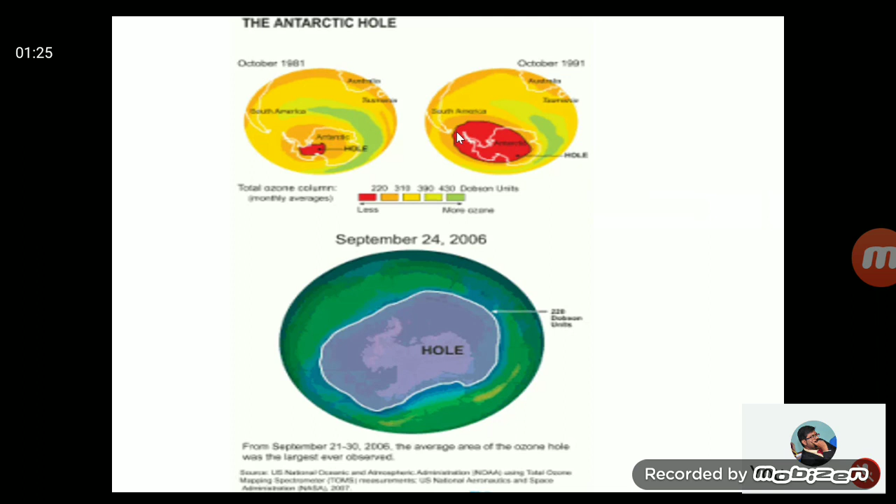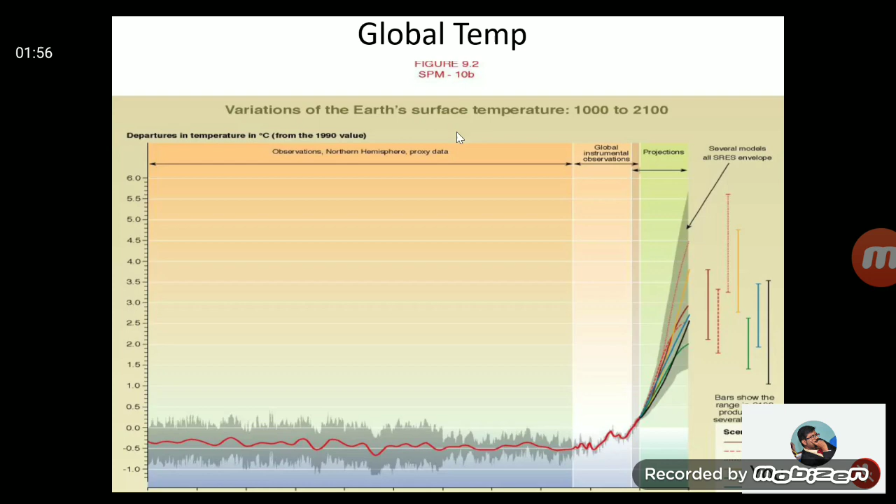Before going to the actual subject, I will also inform you about some basic statistics of our country, India - how the power is produced and how we receive the power. Nearly we have 3,70,000 megawatts in our country, of which nearly 86,000 megawatts is from renewables, apart from hydro at 45,000.

But even though we have nearly 25% of capacity in renewables, you very well know that the plant load factor of renewables is far less than conventional thermal generators. Thermal generators will normally have a plant load factor of nearly 80 to 85%, whereas renewables will have only 15 to 16% in solar and 25 to 30% in wind energy.

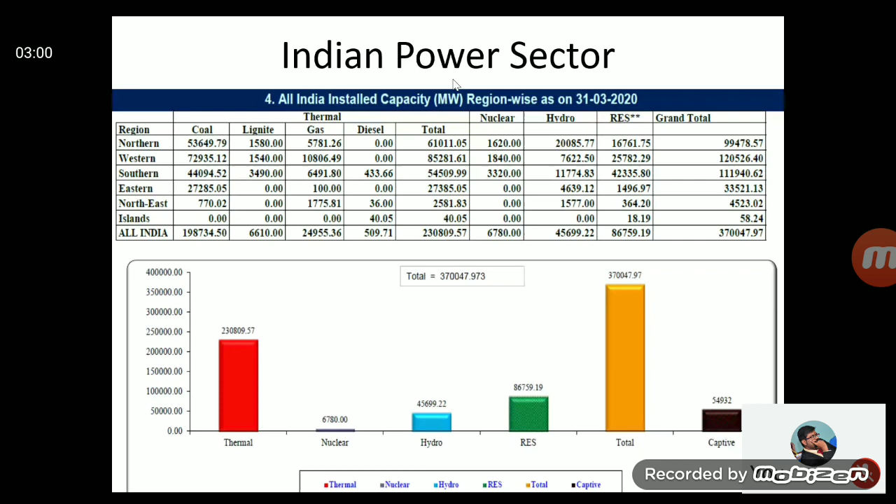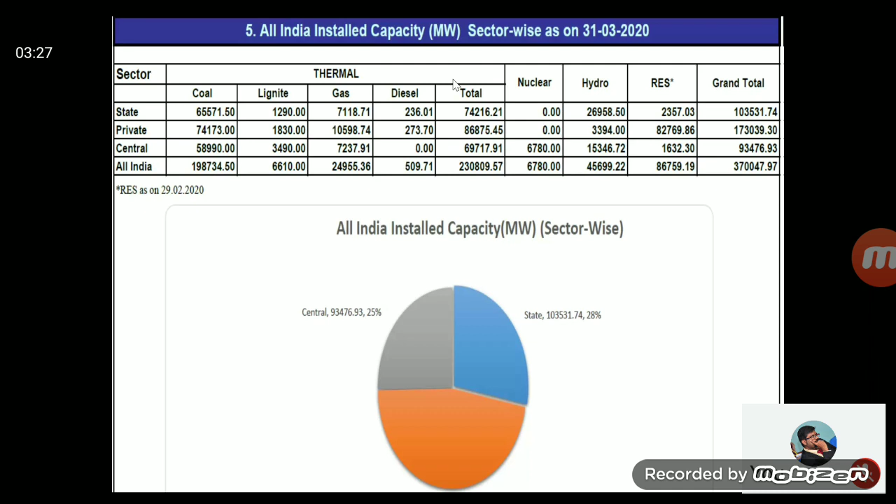Nearly out of 86,000 megawatts, nearly 82,000 megawatts are from the private sector. The contribution from this, all-India peak, comparing with the total generation capacity of nearly 3,70,000 megawatts - the peak of India is only hardly 1,70,000 megawatts.

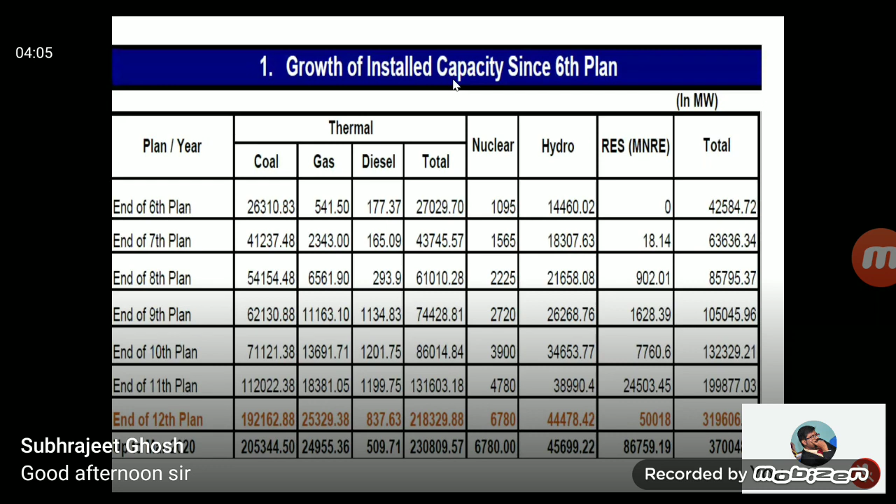So that means we have in India double the capacity of what we need, as on today's scenario. So this is the scenario of renewable addition - you can see that from zero, today it is 86,000. Plan by plan, the contribution of renewables is increasing.

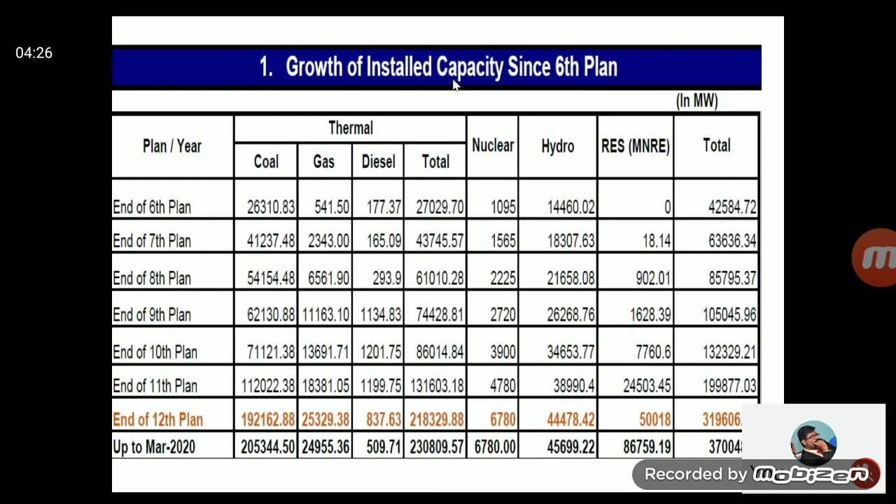As on today, the Government of India has planned to have nearly 1,75,000 megawatts of renewables before 2022. That means nearly the peak demand requirement as of today will be the capacity of renewables by 2022. But at the same time, we have a lot of challenges in doing that - that is a separate subject altogether. But I can tell you the importance of renewables.

This is the contribution of renewable generation, actual generation. It is hardly 10% of the total requirement because of the lower capacity utilization factor of renewables especially.

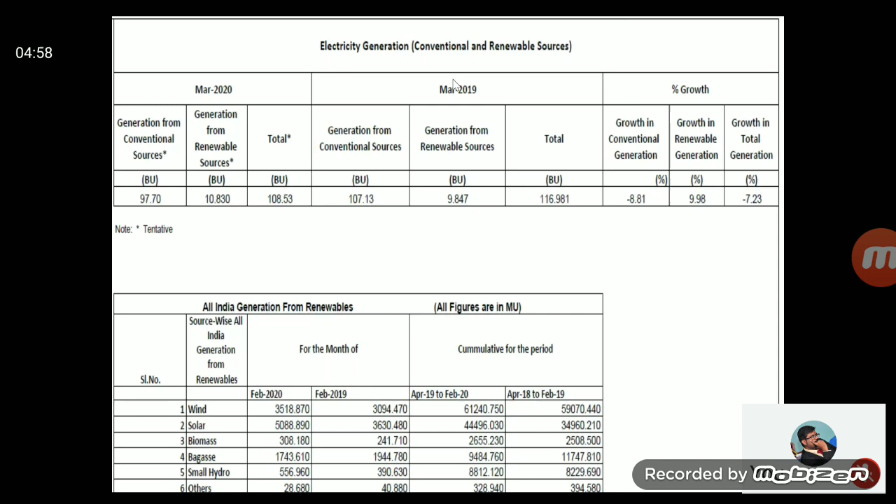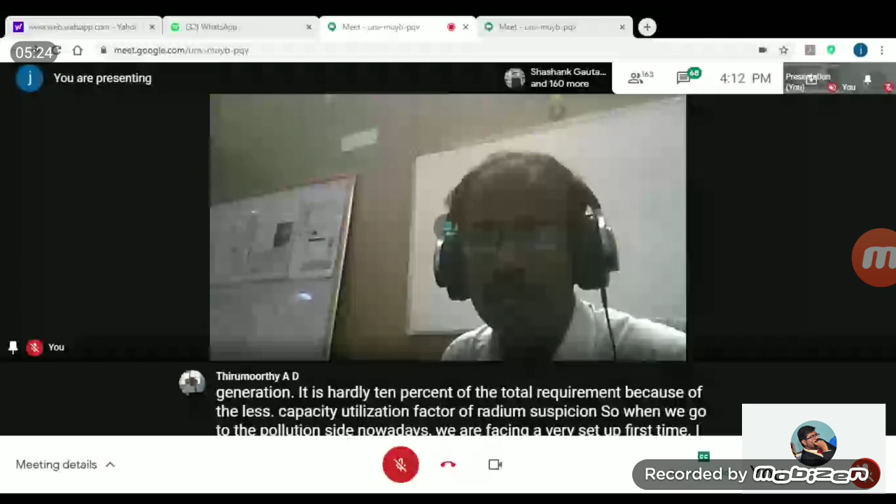When we go to the pollution side, nowadays we are facing a very tough time. I should wish everybody a safe passage during this difficult global situation. But before that, pollution was the biggest issue, a very big issue - even schools and colleges were closed in Delhi due to pollution.

91 to 120 is really poor, causing breathing discomfort to most people on prolonged exposure. 121 to 250 is very poor, causing respiratory illness with prolonged exposure. 250 plus is very severe, affecting healthy people and seriously impacting those with existing disease.

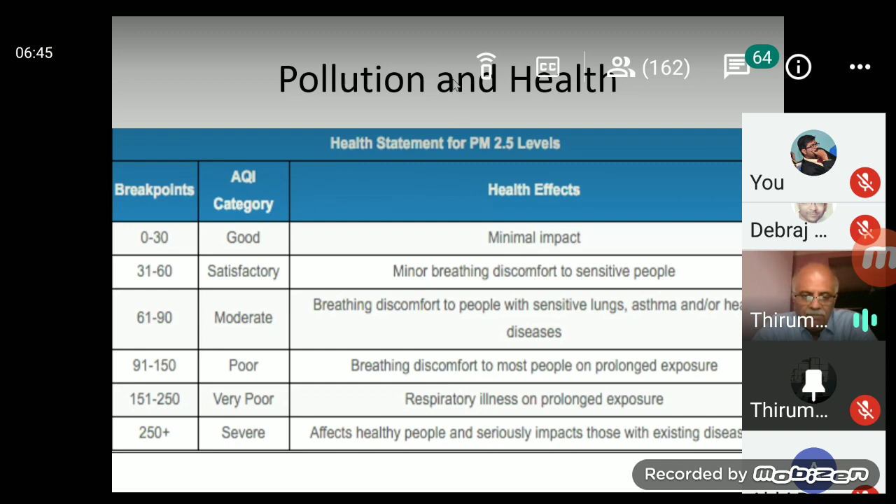After finding these pollution levels, people estimated the life impact especially in Delhi. What they say is that one who lives permanently in Delhi loses 6 years of life due to pollution alone. That is the kind of pollution we see today in most cities, especially Delhi and North India. This shows particulate matter in 2010 - you can see PM 2.5 is a more serious issue than anything else, at 150 micrograms per cubic meter.

In January 2015, it became 226 micrograms per cubic meter. That is the kind of pollution we see in Delhi. 226 means it is almost going to cause respiratory illness with prolonged exposure. Most of the children in Delhi are affected by this respiratory illness situation.

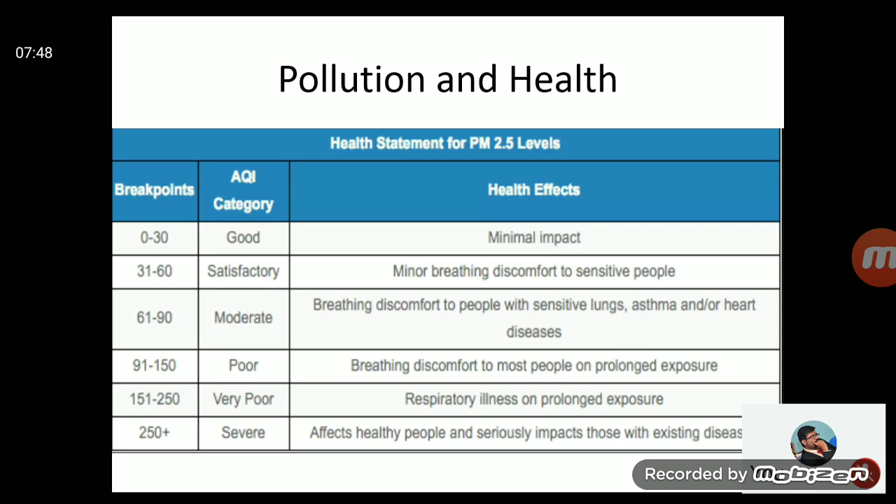In 2013 itself, we have already crossed the danger zone as per the UN report. It has the CO2 threshold of 400 parts per million. It's already crossed the threshold levels in 2013 itself.

So we are facing very critical pollution levels even during 2013, when the Paris meet was organized in 2015, where India and most of the countries in the world are part of this agreement. We have signed that agreement and agreed that we will reduce our pollution levels nearly 30%, so that the rising temperature is limited to nearly 2 degrees. That was the agreement in 2015.

That is being implemented now in our country also. So during that study, they made a study on who pollutes more, where the pollution comes from.

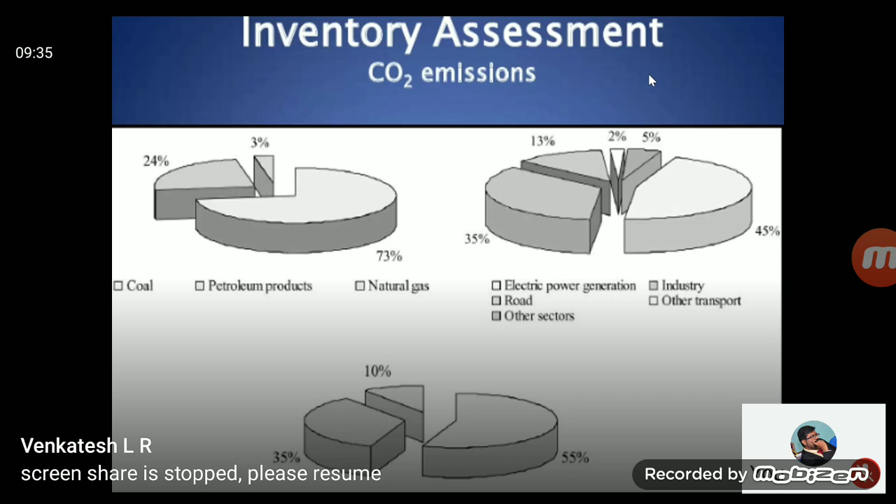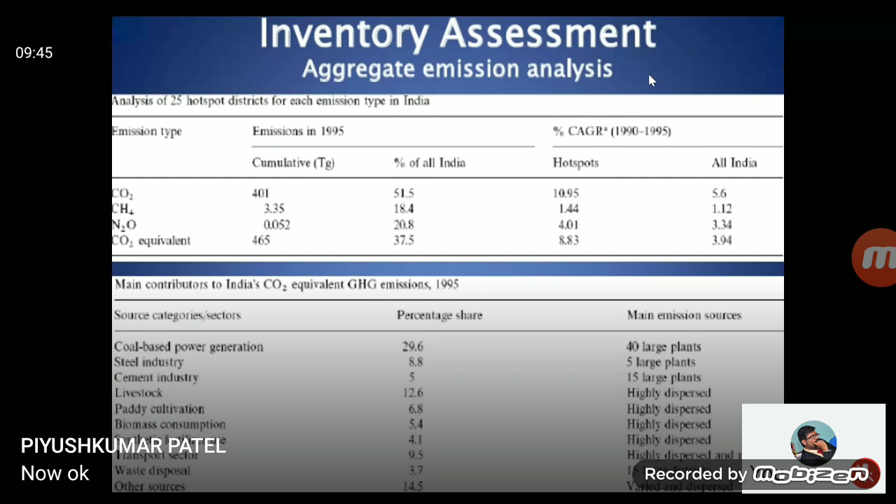If you see the comparisons, this chart shows that coal-based generation's share is nearly 30%. So they have started looking at the emissions, and they have promulgated some schemes to see that emissions are cut to that level.

So who has to start that? Everybody has to start, from home to the industries, to the power generation, the transport. So in every walk of life, we should see that carbon emission is reduced, to see that pollution levels are brought down, and the rise in temperature is limited.

And like during these 3 months' time when transport was cut and people's movement was restricted, everybody shared their views that pollution levels have come down, and we could see the Himalayas from Amritsar. A lot of things people are posting in the public domain show that pollution levels have dropped, and we have good air and a good breathing environment. Animals are having good times during this time.

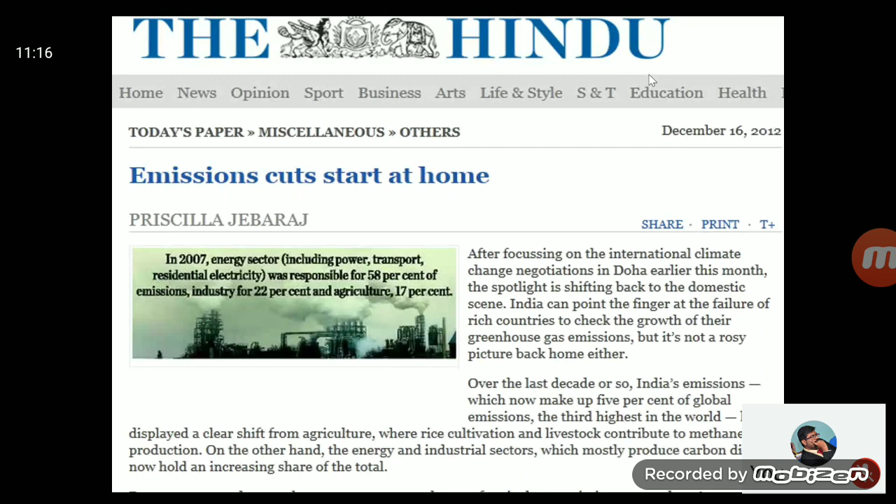It shows that our way of life has created a lot of emissions, to the extent that we are increasing the temperature of the world day by day. One by one, living organisms, plants, trees, birds and living things will get extinct, and it will create a grave situation for human living. That could be the situation tomorrow.

So India could face crippling heat waves. The first thing is that it will affect the agriculture produce, which will worsen with increasing global temperatures.

So we have another phenomenon also coming in, especially for urban people. It's called the urban heat island. You can always experience that urban areas are warmer than rural areas, because urban structures retain the heat, and the heat envelope is created, and the heat island is created.

This is a phenomenon that is already coming, and we should also see that our temperature levels are at least maintained at this level before the century, to see that we have good living in the cities.

To counter this urban heat island, what people do is start having air conditioners in individual houses. Even today, almost all middle class people have 1 or 2 or 3 air conditioners in their houses. They export the heat outside.

So the heat outside doesn't go anywhere. It will be within this envelope, the urban heat island, and it will cause more damage to other living structures, trees and birds, and we may lose a lot of things.

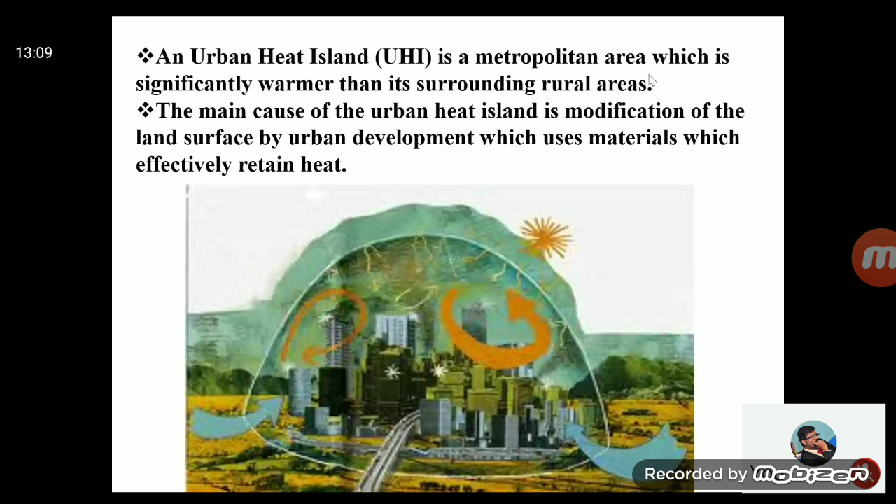So it is better that we contain our heat, reduce our heat, and see if there is any avenue to reduce the heat. So after all these issues, people have started fighting like this, not fighting against nuclear stations, but fighting against thermal stations.

Protesters wear green hard hats as they attend a press conference Tuesday, Feb. 15 to support an early deadline for converting the state's only coal-fired plant from coal to cleaner energy sources. Especially in Washington, they have decided to close the thermal station.

There are some advanced leading countries like Denmark and Germany which have an advanced roadmap. Especially in Denmark, they have planned to go for a green country by 2050, including aviation. They will close down all their thermal plants by 2030, and today they generate more power than the nation requires from wind energy alone. So Denmark is already generating more than their sufficient requirement, and they have planned to go for green energy by 2030, and including aviation, by 2050.

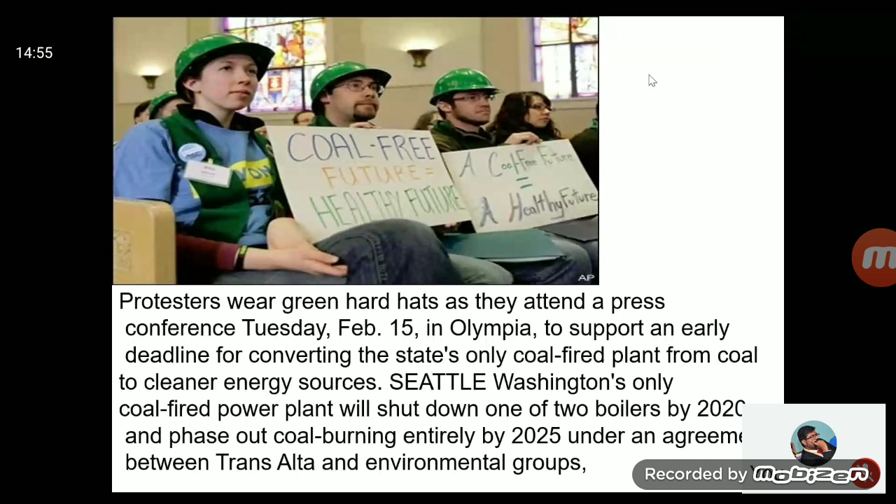A lot of other countries like Germany also have a roadmap to reach the target earlier than what the UN has prescribed. So they understand the gravity of this situation.

So now this is the situation. We require energy. We are actually struggling to meet world standards. If you compare the standards of living, it is directly related to per capita consumption of energy. In India we have nearly 1,000 units per person per year, whereas in advanced countries it is in the order of nearly 16,000 units per person per year. But world average is nearly 3,000. We are hardly near 1,000 units.

So we are trying to increase our demand. But at the same time, as per the Paris Agreement and other agreements, we are compelled to reduce our emissions. We have already found out that nearly 45% to 50% of our emissions are mainly due to thermal stations. In India, the mix is such that nearly 70% of the energy we use today is from thermal stations.

We can very well say that 1 unit of electricity we use emits nearly 1 kg of carbon. Normally we have a saying that one family should grow one tree. A middle class family consumes nearly 10 units per day, that means nearly 3,000 to 3,500 units per year.

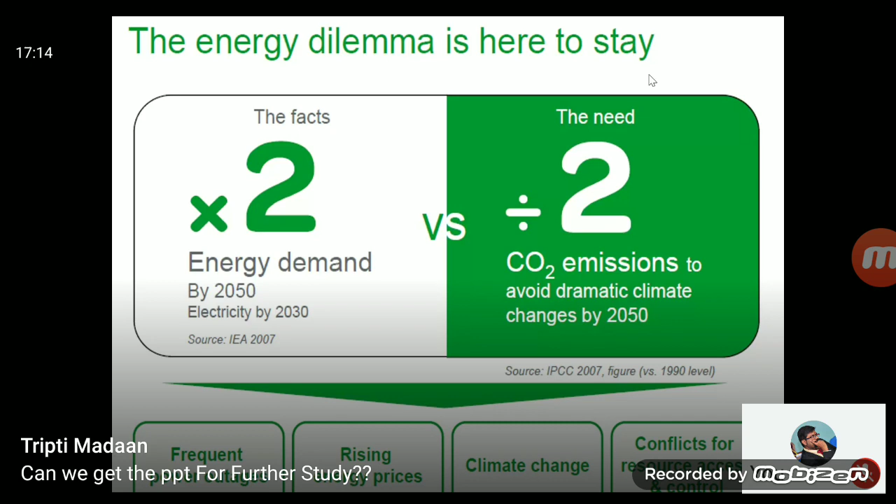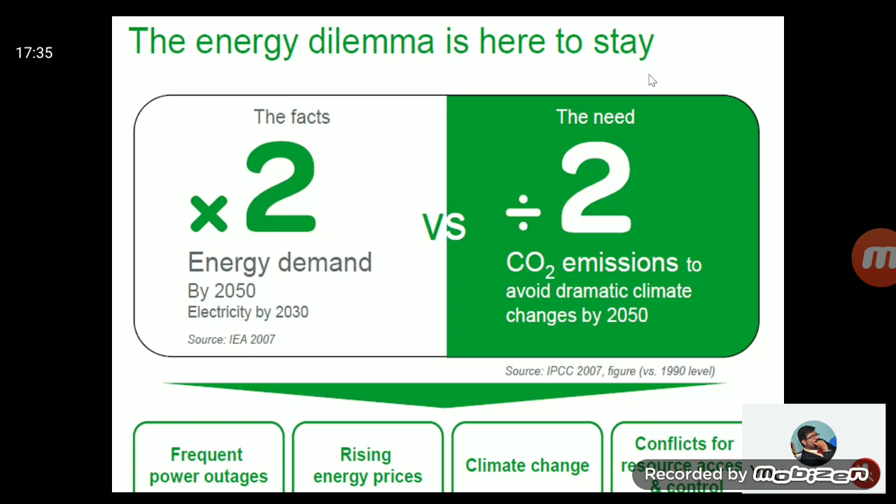So this is the pyramid for that. We have the pyramid at the bottom, we have a very great opportunity in energy conservation. Then comes efficient way of using the energy. Then it's renewables. Renewables in our country are abundant. We can meet all the energy needs from renewables. That is a fact in India.

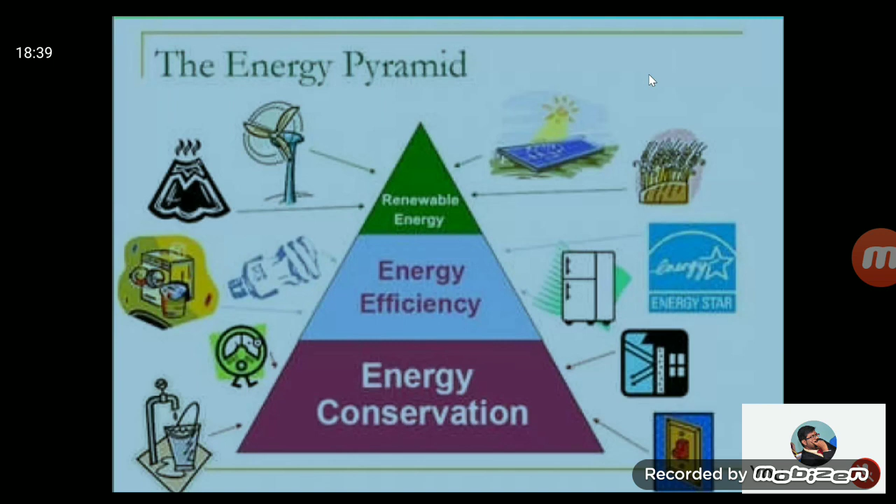But before going into that, because that's a costly affair, we have a lot of opportunity in energy conservation and energy efficiency. After exhausting these two issues, then we can go to renewables, which is abundant. The next generation need not worry that we have exhausted all the coal and petroleum products. We have renewables. But we have to learn how to use the renewables, how to integrate renewable energy into the grid, and to see that we are better using the renewable energy.

So now the country comes with a lot of missions to see that the National Action Plan of Climate Change, as envisaged by the Paris Pact, is being enacted in India. First is the national solar mission, and the national mission for enhanced energy efficiency. So a lot of missions have been started to contain the climate change.

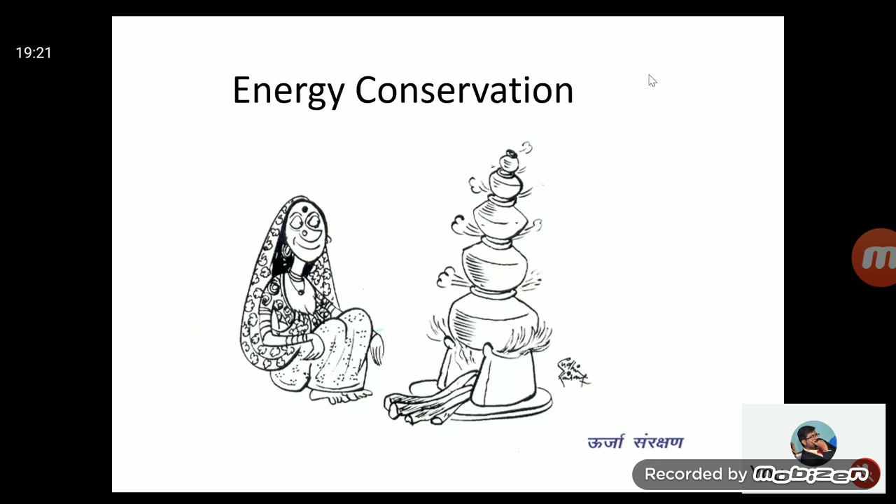Otherwise, this would be the scenario which nobody wants to be part of. When Dr. Kalam was there, he used to advocate that we can conserve energy, and to his knowledge, he said that we can reduce our consumption to nearly 50% in each household. His statement was that we can reduce 50% of the energy by conservation, by better efficiency, and of course, at last, renewables.

But to my experience, my practical experience, I can say that each and every household can reduce 100% of the energy drawn from the grid. So I demonstrate that. I can show you that it is doable. So to talk about the renewables, it is very advantageous.

It is perennial, it is available locally, usually modular in nature, and it is environment friendly. And after all that, it is well suited for decentralized application.

Prior to this century, people were focusing on centralized generation, large mega size generation plants. We used to start from 100 megawatt, 250 megawatt, then 500 megawatt, then 1000 megawatt. Even today, there are some plants which have nearly 4000 megawatts of capacity generating power.

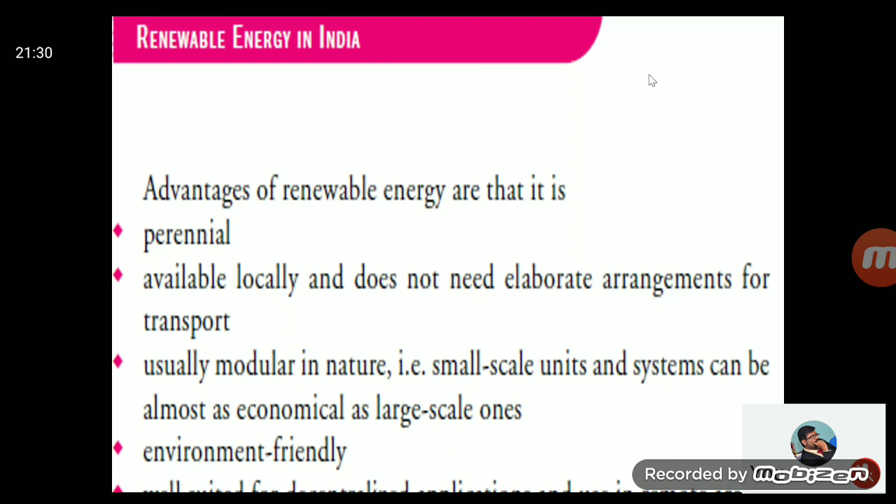But in future, when we concentrate on renewables, we'll focus on decentralized applications. So in the past 5 to 10 years, there has been a lot of study on decentralized ways of distributing power, and we have case studies that successfully demonstrate decentralized power distribution is possible, especially from renewables.

This is a graph to show what the future will be. People estimate that the future will be with more solar, and supporting renewables from wind, and to a certain extent biomass and other energy.

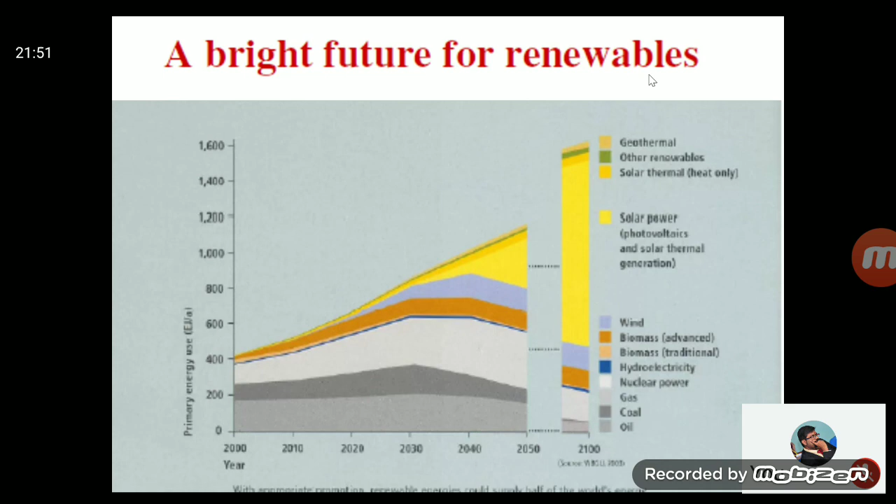This one is a very simple thing, very common one, but still people have to adopt it. This is a simple solar water heating system that can replace geysers. Each and every household, if they can replace the geysers, can save up to 1,500 units per year. That means, if you divide by 20, nearly 75 trees equivalent to growing 75 trees.

Who can grow 75 trees? The simple thing is you can replace your geysers with solar water heaters. I can tell you from my experience, I have been using solar water heaters for more than 25 years.

Until today, I have not faced any issues because I live in Coimbatore, and part of the year in Coimbatore we have a chill climate. Apart from March, April and May, all other days in our city require hot water for bathing and other uses. Cities like Bangalore, Pune, Bombay also require this kind of hot water, especially for household use and institutions.

And this is an easily replaceable unit, which can save nearly 1,500 units per year per family. You can see the amount of water heaters in use if you travel to China, where each and every household has a solar water heater, even though their sunshine hours and sunshine days are less.

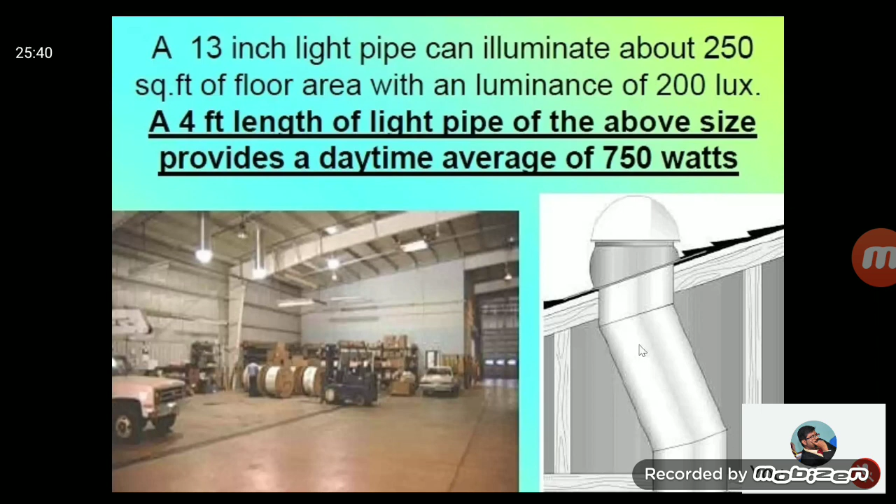This is another beautiful arrangement called a light pipe. You can see that the light pipe carries light from your rooftop and brings it to your place wherever you require lighting. This is not a bulb lit by electricity. This is a bulb where the light brightness is transferred through this pipe to anywhere you want. So this is also possible.

During the daytime, you can save electricity and have natural light inside wherever you want. This is one office building in Coimbatore where they have brought daylight inside without using electricity. This is also possible.

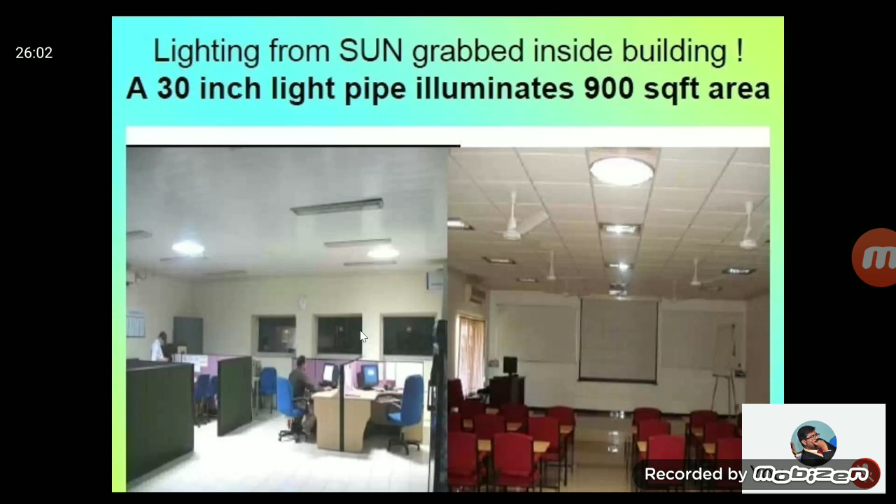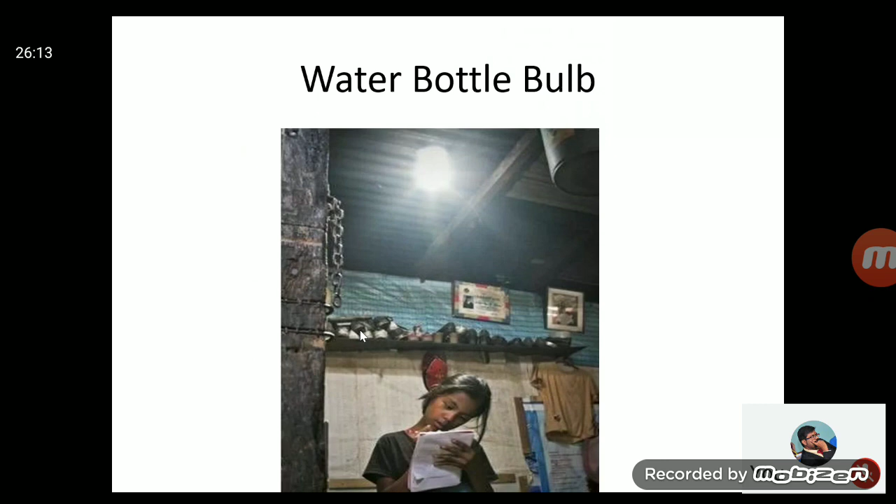This is another innovative item, even though we can see that this is also a bulb, it is simply a water bottle, which is used to bring daylight inside your room. A lot of these kinds of installations can be found in Vietnam, where they have done this.

Another good application is solar pumping. I'm not going to elaborate on solar installations, but I can tell you that solar pumping is a unique way of solar application, because any solar application, solar PV electricity generation, cannot work without the usage of grid, battery or generator. Any one of the three should be associated with the solar panel, otherwise the solar panel will not generate electricity.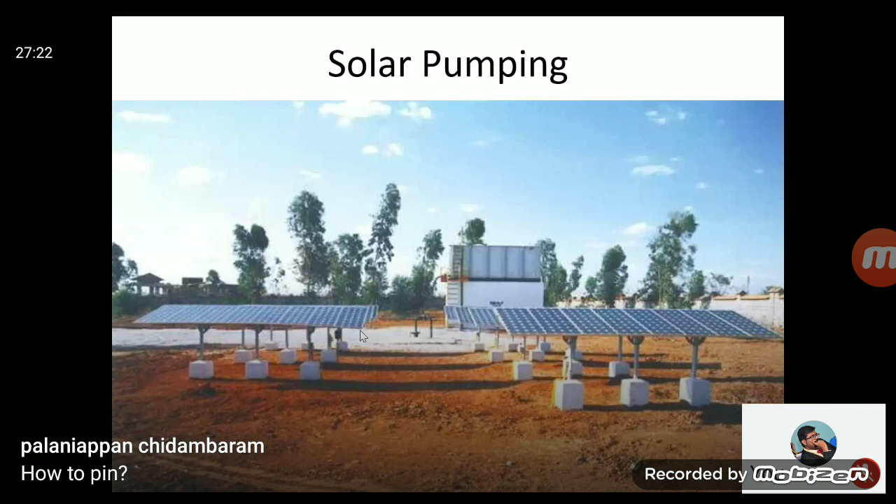But this is the only application, solar pumping, which doesn't require any of the three. It is a standalone application with variable frequency drive. It can operate during the daytime, isolated and also remotely controlled. Nowadays it is possible to remotely control it too. So solar pumping can be used where there is no grid or very weak grids. The government of India and most governments are behind this kind of application. A lot of agriculture pump sets are being replaced by these systems, saving a lot of electricity and containing a lot of emissions.

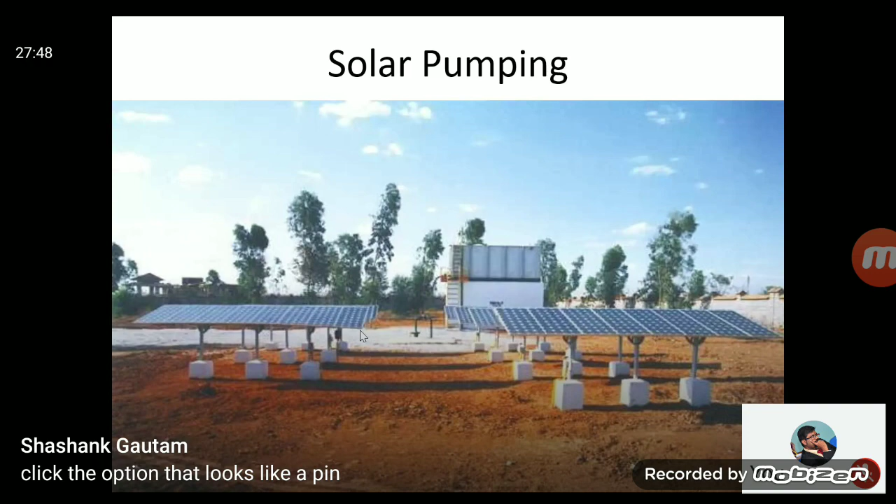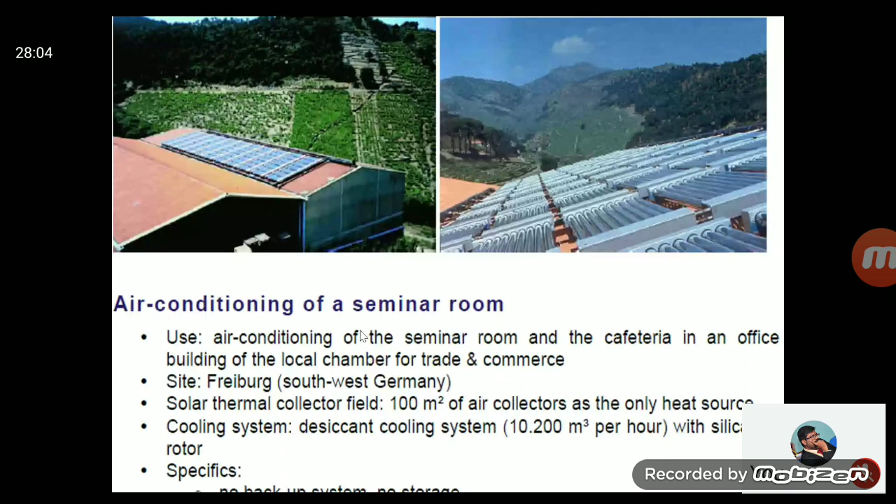So this is also possible tomorrow - air conditioning by using solar heat energy. The number of installations are available in other countries. Even in our country, a lot of models and pilot models have already been erected and successfully operated.

In solar application, there are two types of application at domestic level. One is that it can be off-grid. It can generate power, store it in the battery, and you can simultaneously operate your equipment. Excess power can be stored in the battery, and whenever sunlight is not there, you can operate your equipment from the stored energy.

In tomorrow's scenario, energy storage is going to be a very big activity. In another 3 to 5 years' time, energy storage will play a major role in the electricity business. It will become very cheap, and everybody would like to go off the grid because it saves a lot of money - you can generate your own power.

The roof gives you more power than you require, nearly 4 to 5 times of the power what you require. That much power is available on the roof - only that you have to tap it and use it comfortably.

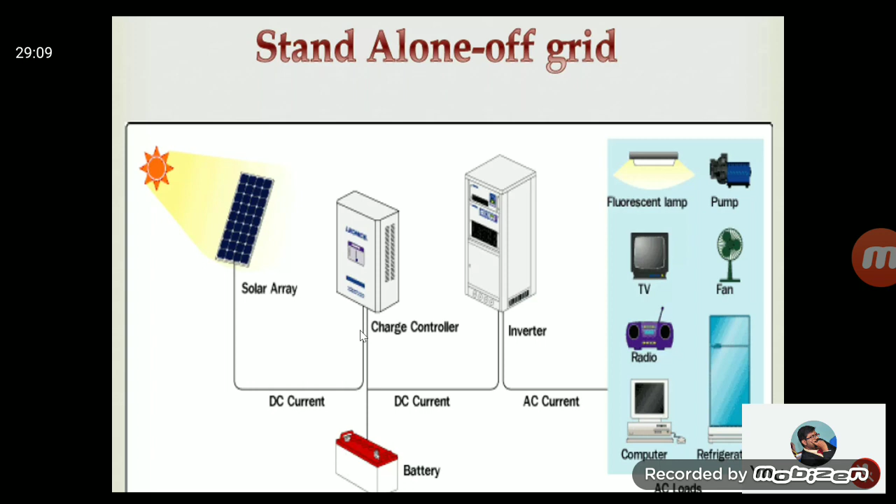Another system is that you connect it to the grid. It interacts with the grid. Whenever power is generated, you use it along with the load. Excess power is pumped to the grid, or whenever solar is not there, you take power from the grid. The grid acts as a storage device for you. So it's a net metering arrangement - whatever power you have exported to the grid, you can utilize. This is the on-grid arrangement for solar.

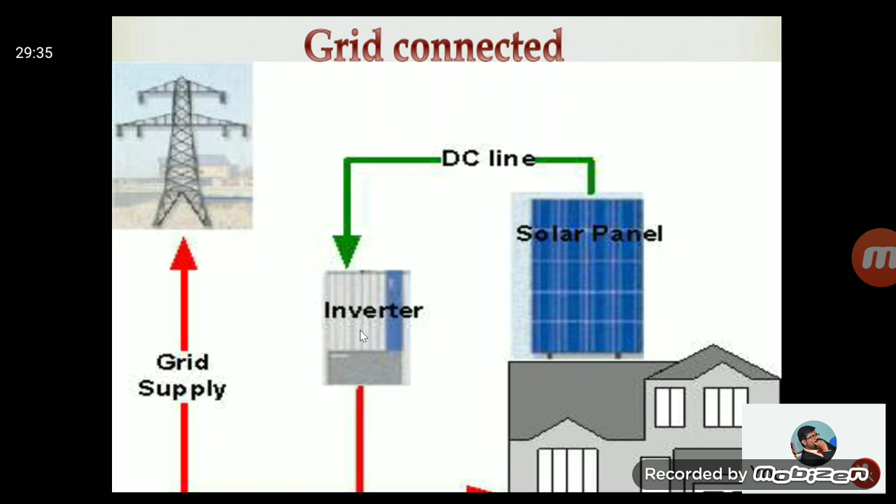This is a net meter arrangement in the houses. Most of the states have allowed net meters, especially for the domestic sector, because you generate power during the day and use it during the night times and during the evening peak time. So net meter arrangement is a very good arrangement for them.

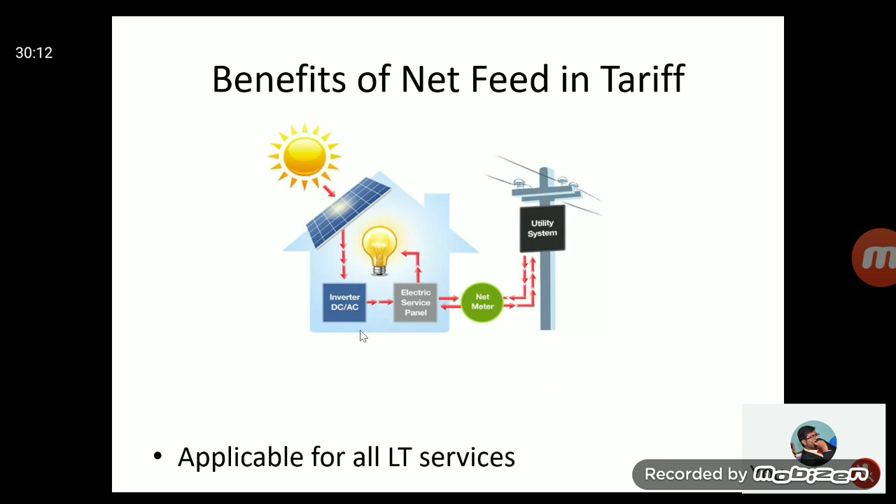You export power during the daytime, when you are not there, when your equipment doesn't require supply, and whenever you want it, you take power from the grid. That is the net meter arrangement. Most of the states have allowed this kind of arrangement.

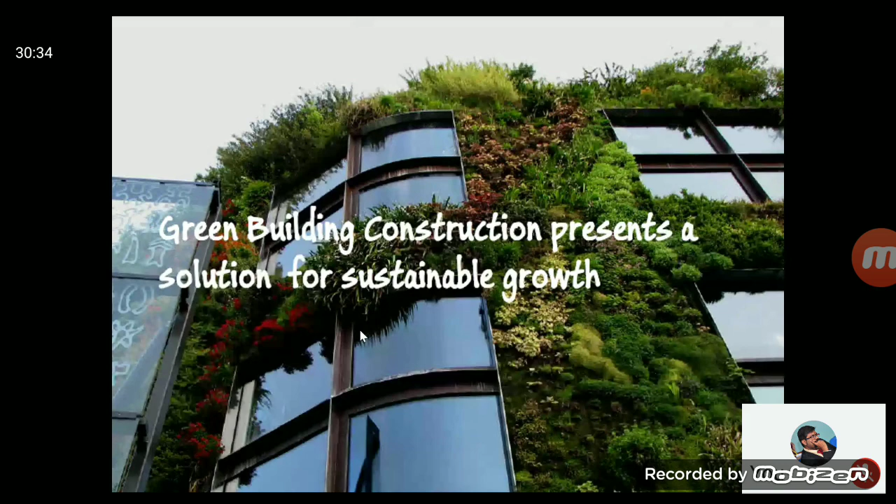So we now go to the green building concepts. Green building concepts are now picking up, and in the past 5 to 10 years a number of buildings have opted for this kind of concept, and some have even gone for zero energy concepts. Green building is the practice of creating structures using processes that are environmentally responsible and resource efficient throughout a building's life cycle - from siting to design, construction, procuring materials, operation, maintenance, renovation, and deconstruction. This practice expands and complements the classical building design concerns of economy, utility, durability, and comfort.

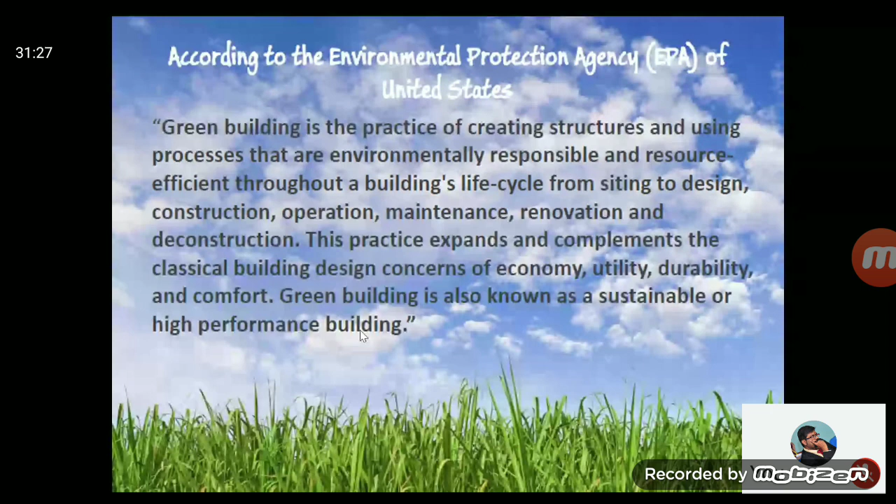Green building is also known as sustainable, because other sources of energy are not sustainable. As we have seen, thermal energy will naturally die down due to depletion of coal, and by social and political compulsion we are going to phase out thermal generation, so we will be left with green power. So green building construction is rapidly gaining momentum, especially in India.

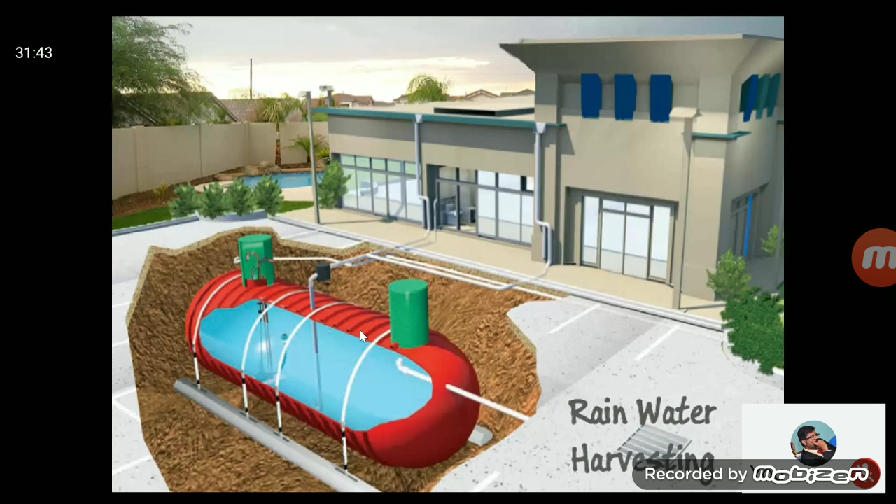Key green building features: you absorb more daylighting, and rainwater harvesting - the entire rain you get in your space is collected and safely stored so that you can use it throughout the year. Nowadays there are buildings, especially domestic buildings, which harvest rain on their rooftop and use it for almost throughout the year. There are a number of case studies available, and this is doable today.

And you recycle the water - that is possible, and many people are doing that. Renewables are abundantly available today, only it's been a matter of cost in previous years. Today almost grid parity has come for solar and wind, and you can use renewable power to the extent you want - renewable power energy is available.

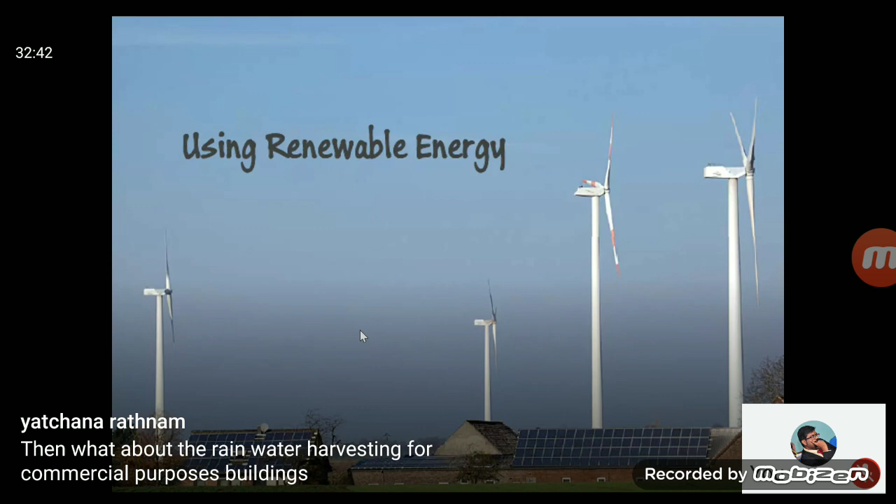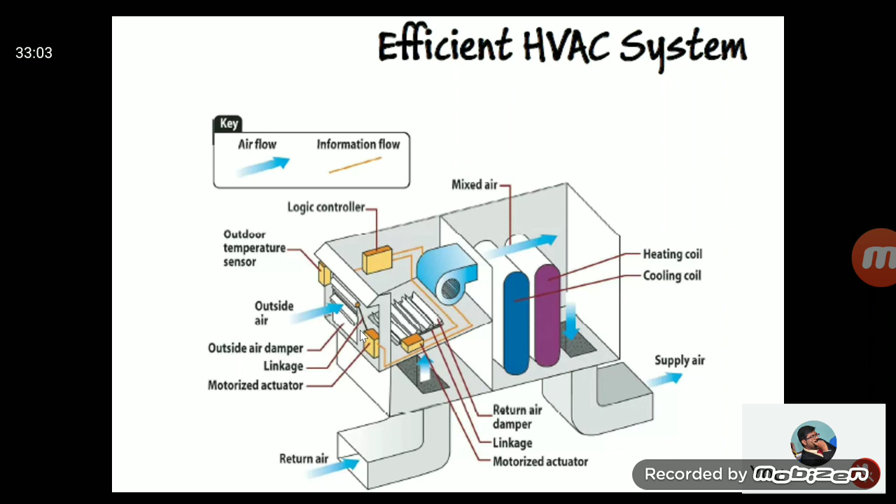So building a green roof reduces the consumption of energy. You have to see that water is efficiently used, because we may end up with water scarcity also. So better go for HVAC systems to see that energy is consumed less. Benefits of green building: energy savings, water conservation, low carbon footprint, reduced environmental impact, better indoor conditions - indoor air quality is definitely improved.

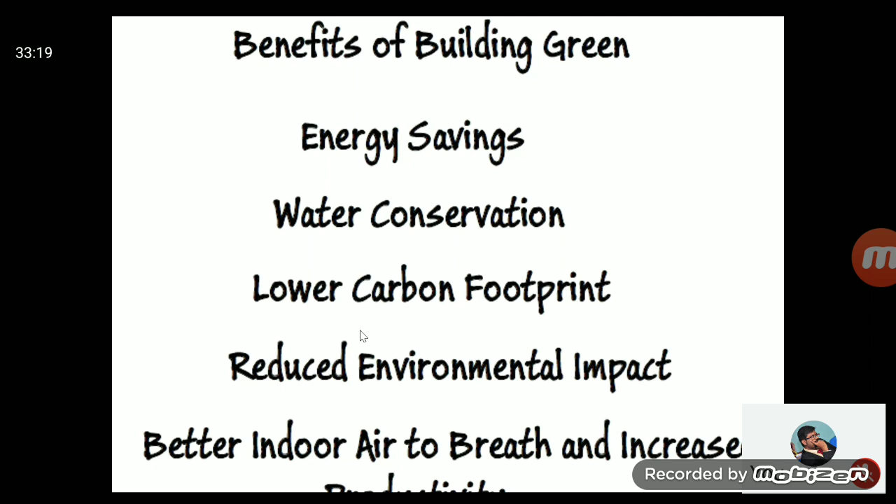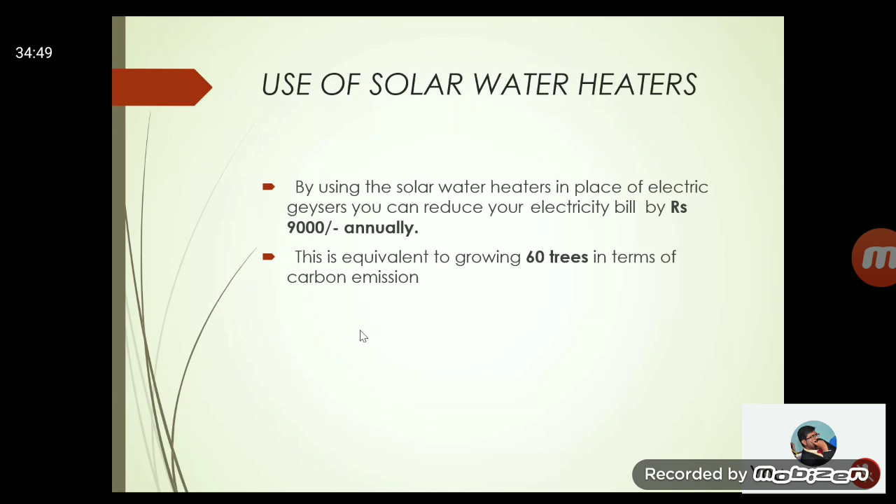So I can say that use of solar water heaters reduces your billing, and is also equivalent to growing nearly 60 to 70 trees. You may not be able to grow 60, 70 trees, but you can equivalently reduce the carbon emission by replacing the geyser with a solar water heater. If you adopt solar water heater in your home, annually you can save nearly 9,000 rupees. But equivalently, it is equivalent to growing nearly 60 to 70 trees. Growing 60 to 70 trees is more important in this phase than your savings.

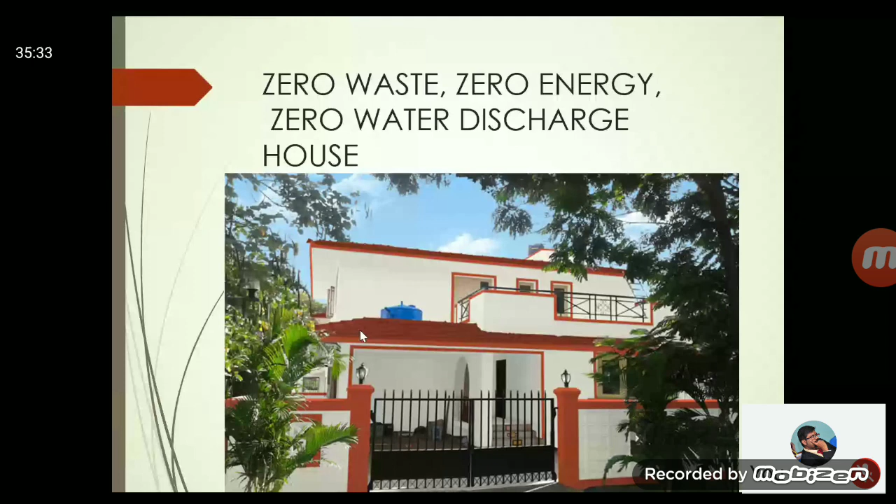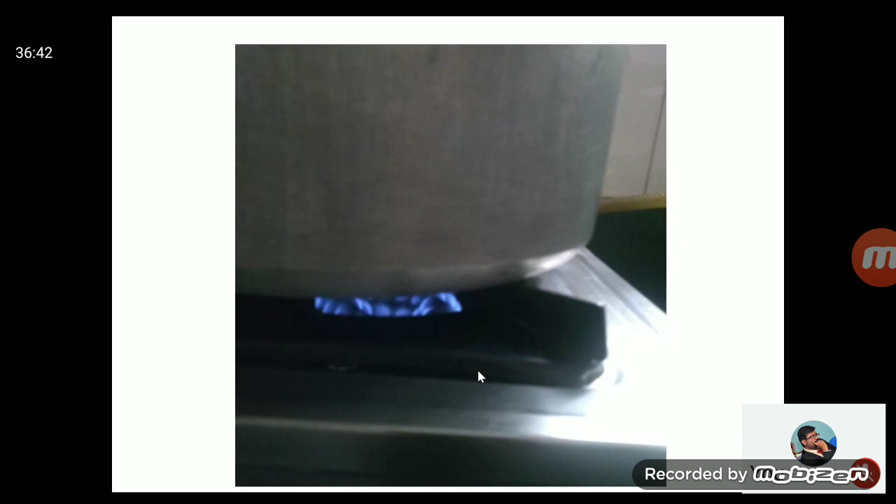This is the rubber tube coming from the biogas plant, and you can see it is almost a blue colored flame without causing any blackening of the vessel. No odor in the kitchen, not much effort taken - it hardly takes 5 to 10 minutes of your labor. Even carrying the waste to the road bin and throwing it away takes 5 to 10 minutes of labor. That much effort is required for this plant too.

This plant doesn't require any additives, no maintenance is required. It will also give a liquid manure, which can be used in your organic garden to grow vegetables and greens. So completely, all your waste is recycled and used.

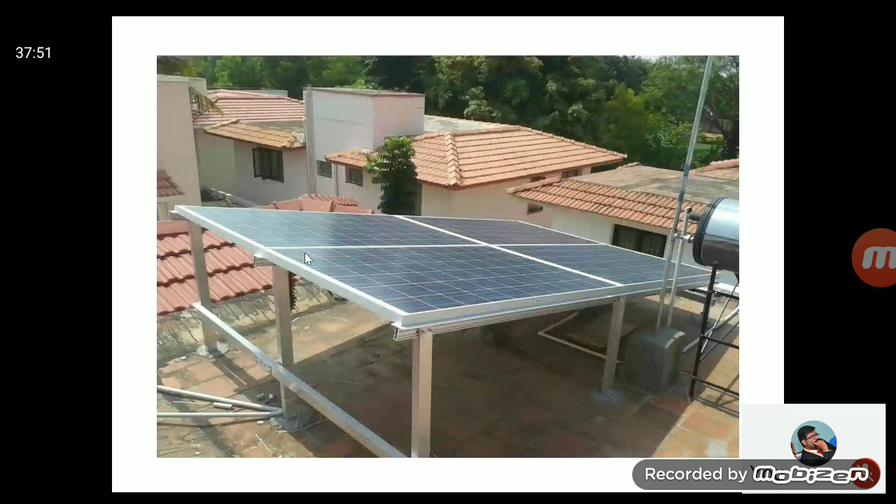This is a practical case study. This house has solar panels of nearly 1.5 kilowatts - this is the 500 watt one, this is the 1000 watt, totaling 1.5 kilowatts. This house also has a solar water heater, so all the energy requirements of the house are met by these solar panels.

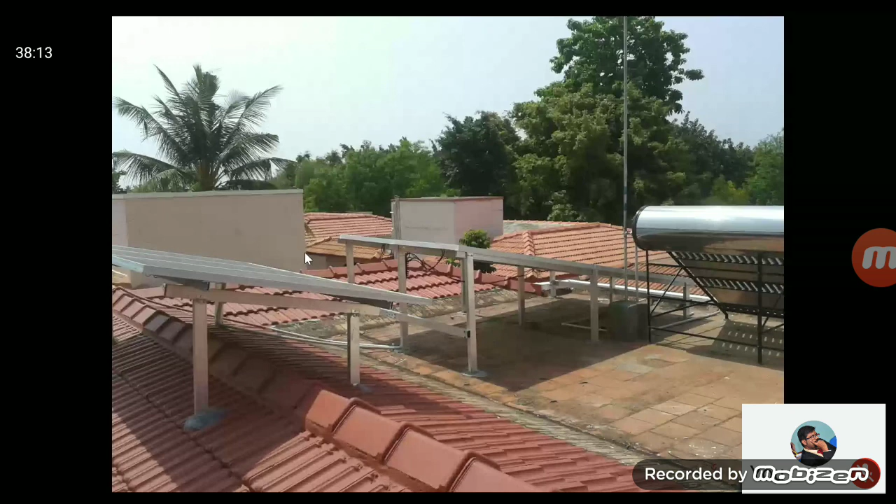This house has not paid an electricity bill for the past 7 years, so it is a zero energy house. For 7 years, this house hasn't paid any electricity bill, and all the waste has been consumed by the house itself.

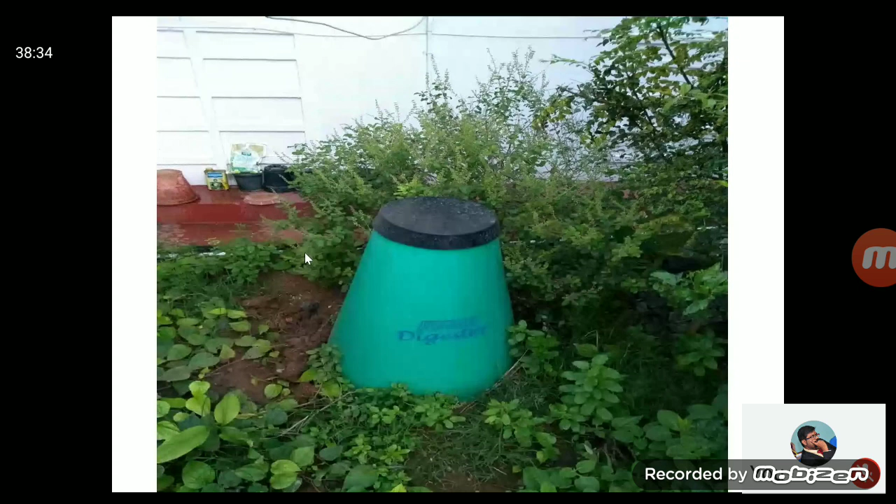Apart from that, if you have more waste, you can put it into this digester. This digester will consume any amount of waste. It's not removable and need not be maintained. All the waste that goes inside is automatically converted into manure and goes into the soil. The nearby soil becomes fully rich, and you can grow any plants in this area. If you bury this digester in your garden, you can grow any plants or trees, and it will supply the entire nutrition for all these plants.

This digester takes all the biodegradable waste generated from the house, including paper but not polythene. It takes it in and digests it for years together. You need not clean it and need not replace it. You can keep putting your waste inside, and it gets digested into the soil, enriching the entire garden in your house.

It is a beautiful biodigester, and this arrangement is manufactured at Coimbatore - any city can manufacture this, it's not new rocket technology, anyone can manufacture it. So you can see how beautifully greens are grown in the garden, and a lot of vegetables are also grown in this garden.